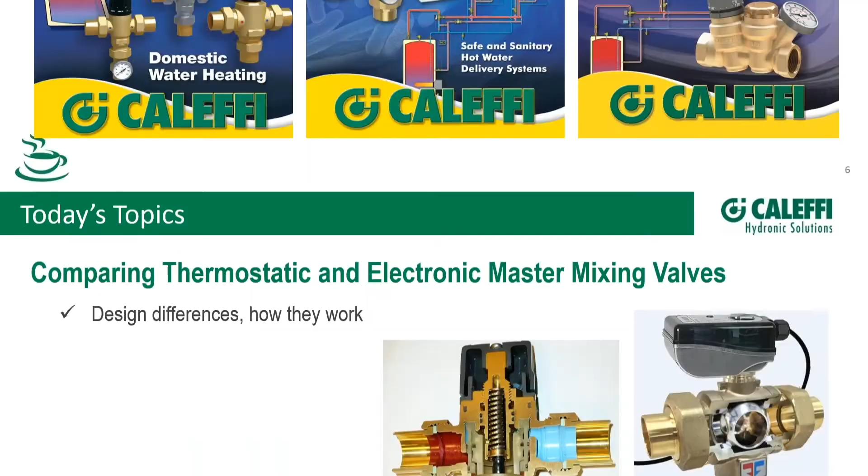All right, let's talk about today's topics. We'll discuss differences in designs, performance, accuracy, things like proper piping, flow rates. We'll look at some specifications and requirements that are different from thermostatic to electronic master valves. We'll talk about recirculation and balancing - that's a really interesting and information-packed section of the PowerPoint. We'll touch on service and maintenance. And then lastly, we want to talk about thermal disinfection, raising the temperature to kill Legionella bacteria - that's near the end of the presentation.

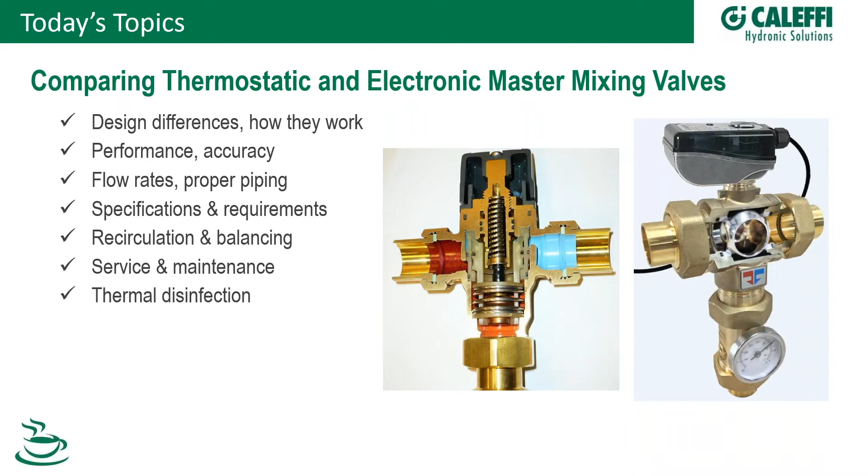So at a high level, 50,000 feet, here are some things you might think of when you think about the main differences between thermostatic and electronic valves. What comes to mind first is cost - in general, a thermostatic valve is going to be less. That might not always be true, but in general that will hold true. Next, ease of installation and familiarity - lots of these are installed out there, approaching 1 million, right Bob? People are very familiar with thermostatic valves, so that's a simple one.

Ability to handle scale - this is an interesting topic. An electronic valve gets the nod there because there are some models that can actually do a periodic sweep or rotation of the valve seat to flush away scale, and we'll touch on that too. Min to max flow range - in general, an electronic valve can handle maybe a lower min and a higher max, and we'll look at that too. We'll also talk about recirculation temperature creep.

This comes up a lot - we get a lot of questions about creep. What is it? How do we prevent it? And then we'll talk about added functionality, alarming, remote access - electronic valves get that nod as well.

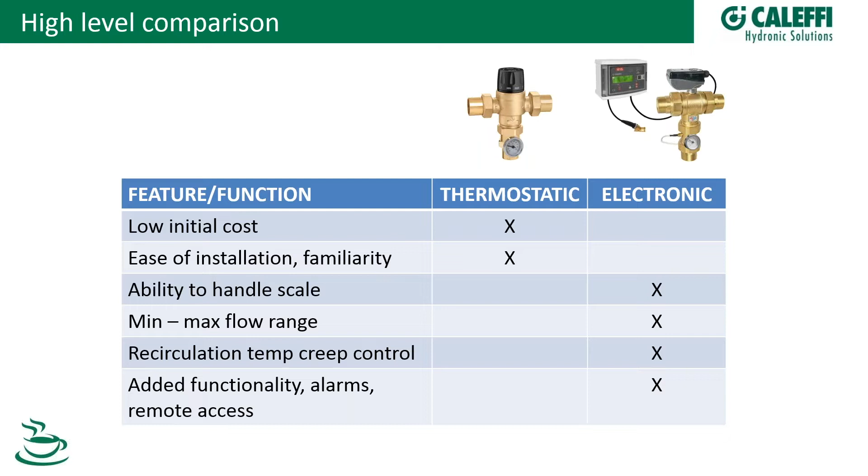Before we get into the meat and potatoes, we have a poll question. We'd really like it if everyone could answer this: for plumbing applications, have you ever specified or installed thermostatic mixing valves, electronic mixing valves, both, or neither yet? I'll pause for a few moments and let everybody enter their vote. We'll run this for about 30 seconds, but we're just trying to get a feel for what's being used out there and how much traction these new EMV electronic mixing valves are getting in the market. That'd be good information for us to have, so we make sure we're on the right page as we develop this product.

So there we go - thermostatic mixing valves at 47%, EMV's electronic mixing valves only 2%, both 39%, and neither at 13%, Kevin. Yeah, that is interesting. Thanks everybody for doing that.

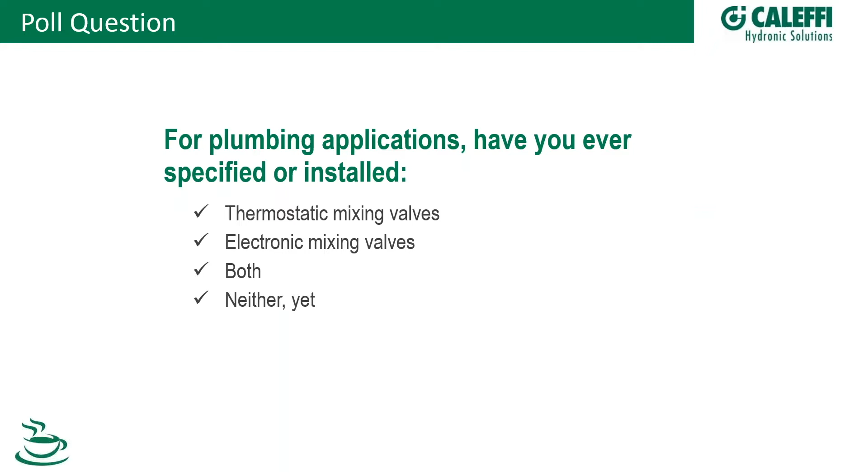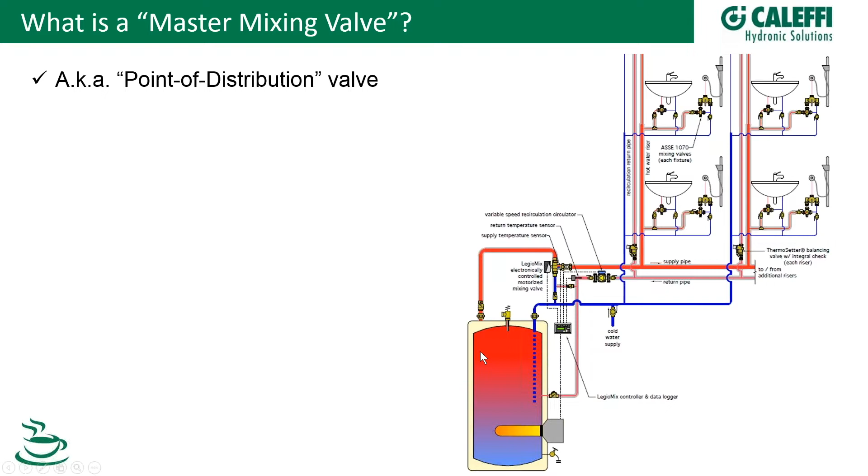Let's get into it. So the first thing we need to do is define what is a master mixing valve, so we all know what we're talking about here. It is a point of distribution valve. If you look at this schematic here, this particular schematic has an electronic master mixing valve. So this is at the point of distribution, which means it's located near the hot water supply.

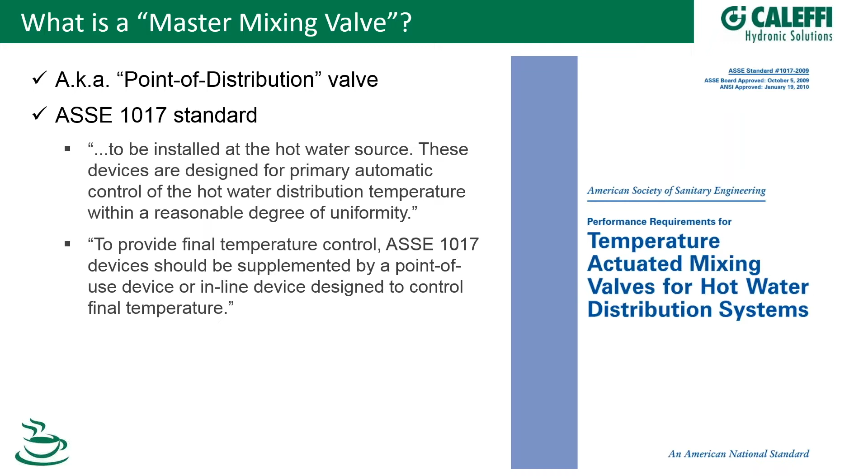These valves are governed primarily by a standard called ASSE 1017, and this is the cover of it, and a couple of quotes that describe what it is. This standard describes the point of distribution valve, and it also says you need to be providing point of use or inline devices to prevent scald protection and do final control. The way I remember that is ASSE 1017 comes before 1070, and those point of use valves are 1070. Let's take a look at just one slide to look at what this standard is.

It's interesting. There's basically three tests in this standard, and the first one is a conditioning test. So what they do is run the valve with 200-degree water and 125 psi for 6 hours. That's a kind of a torture test to begin with, just to make sure the valve doesn't leak or blow up or fail in any way.

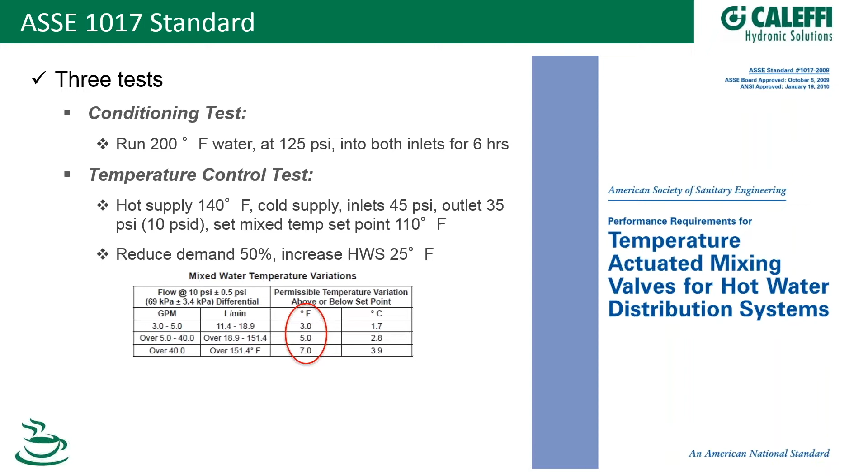The main part of the test is a temperature control test, and so what they do is provide 140-degree hot supply. The cold supply water is whatever's available, and the inlets are set at 45 psi. That's the cold and hot inlets, and the outlet at 35. So there's a 10 psi difference across the valve, and they set it for a 110 degree set point.

And then at that point, what they do is look at the actual water, and that table shown down below is the accuracy. So depending on the flow of the valve, they make sure that it's plus or minus 3 degrees if you're in that low flow range of 3 to 5 GPM. And you can be plus or minus 5 degrees in the middle range, and then plus or minus 7 degrees at the high range. So what they're really doing there is defining the accuracy that the valve needs to handle to pass the test.

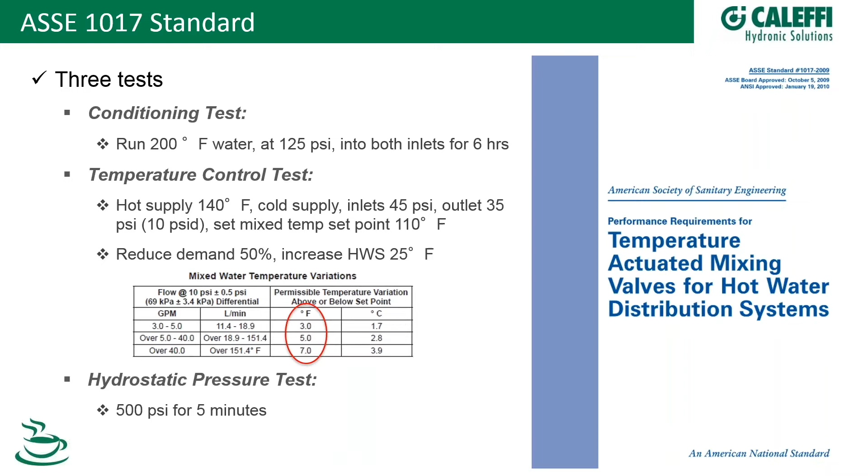And then they reduce the flow by half and increase the hot water supply by 25 degrees. And the valve, during these changes, it has to be stable within those temperature variations there, and then it will pass that part of the test. Lastly, they do a hydrostatic pressure test and pump it up to 500 psi for 5 minutes and make sure it doesn't blow up. So that's really the test that is used to qualify a point of source valve.

All right, let's cut this thing open and see what's inside of a thermostatic master mixing valve. Now, this is pretty typical for any brand that's out there, but mainly there is this, I call it a thermostatic motor. So this gold part right here that the arrow is pointing to, that is a sealed element, and it's filled with a special wax compound that's heat sensitive. And what it does, it expands and contracts and causes this linear motion up and down right here.

So as it heats up and expands, what it does is move this cylinder or this cartridge right in the middle of the body here up and down to then proportionally mix the hot and cold water coming in. So as the element is warm, it expands, and as it cools off, it contracts to mix that water.

Now, what's important for stable control is that you have well mixed water around that motor. If you have laminar flow or really low flow coming in through those ports, then you can envision that thermal motor might be hot on one side and cold on the other. And at very low flows, that can happen, and then the valve can be unstable. That element might not be sure what to do if it's hot on one side and cold on the other. So it's important to have enough velocity and well mixed water around that motor.

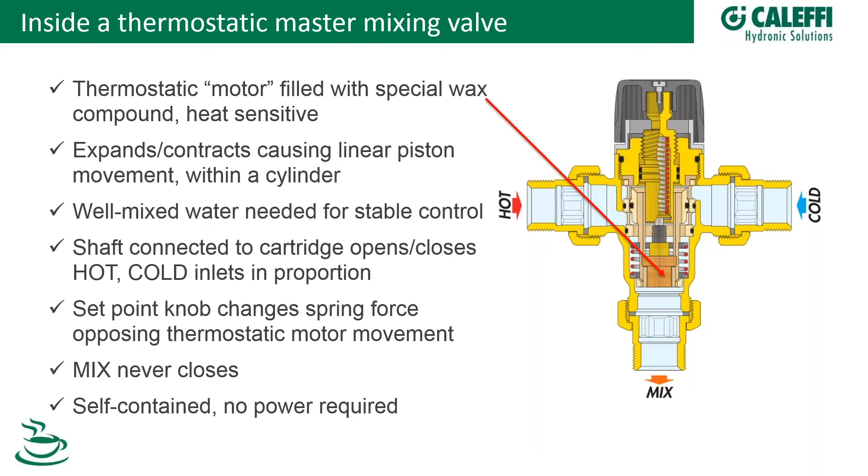Let's look at an electronic master mixing valve. Now, this sample is just a globe type valve. There are other types of valve, but the difference between an electronic and a thermostatic - in this one, it's linear also, so the stem right here moves up and down.

That's similar to a thermostatic mixing valve. And inside, if we look at this cutaway, what we'll see up in the stem area or the bonnet of the valve are some packing seals. The ones I'm familiar with have a Teflon type of what's called a V-ring, and they wipe the stem. Typically these stems are stainless steel, and those packing seals keep the stem clean as it moves up and down.

And this example here, if you look, there's 2 inlets - an A inlet on the left and a B inlet on the bottom. And there's 2 seats there, so that plug has a seat, a mating surface on the bottom, and another mating surface on the top. So as the stem moves up and down, it proportionally changes the flow for the 2 inlets to the outlet. Now, a lot of globe valves have metal to metal seats. What that means is there's no soft seating surface in there. And a metal to metal seat is going to have some amount of leakage, and we're going to talk about that in just a minute.

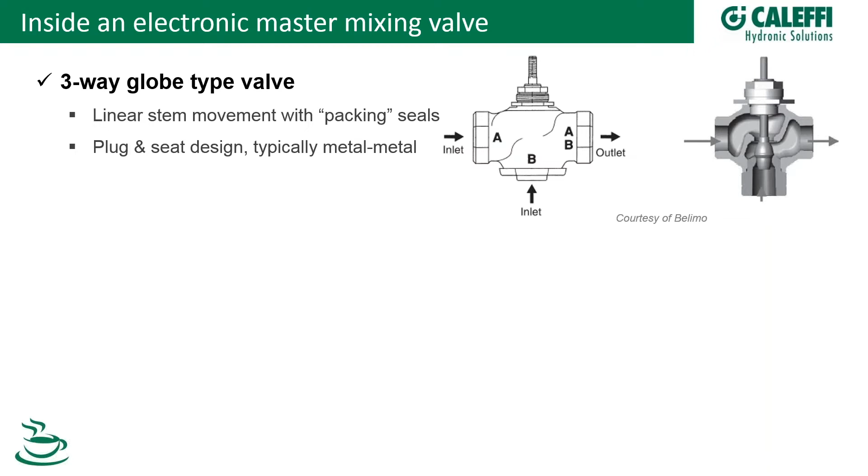Another kind of electronic master mixing valve type is a rotary or a 3-way ball valve. Here's a cutaway of the Caleffi Legiomix. So rather than being linear, it's rotary - the stem rotates 90 degrees, and up in the stem area, typically you'll have O-rings. So as the stem rotates, it rotates within the O-ring seals. And that ball will rotate - there are rings on the edges of the ball here, and that's where the seal is provided on a ball valve that's rotating.

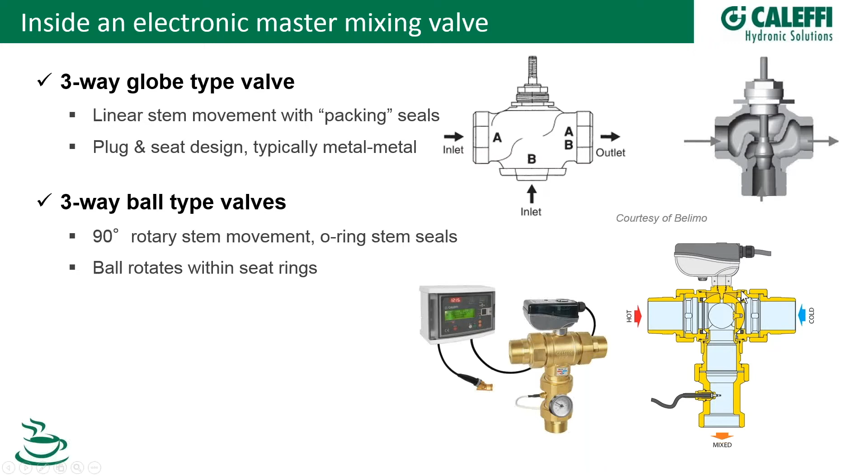So both of these types, no matter what kind of electronic master mixing valve you have, they require some sort of proportional or floating control actuator. They have to modulate. A proportional actuator would be a 0 to 10 volt or 2 to 10 volt, or perhaps a 4 to 20 milliamp proportional type signal, or a floating, which is a 3-wire drive one way, drive the other way signal. Those are all modulating, and to do mixed temperature control, you have to modulate.

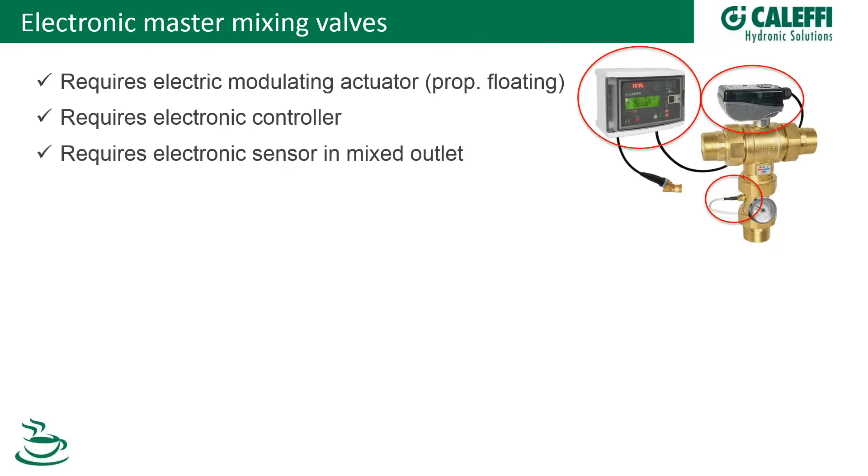So that's the actuator. You also require a controller - something needs to tell the actuator what to do, and that is, in this case, the controller for the Legiomix. And you have to have a sensor in the mixed outlet. In this picture, you can see that sensor next to the gauge is screwed into the outlet adapter there, and that sensor is wired to the controller, which then tells the actuator what to do.

Here's a flow chart or diagram that I like to use. In the mixed water is a temperature sensor. As the water temperature changes, that sensor sends a signal back to the controller as an analog input, and within the controller is some type of control algorithm. This might be a proportional integral, or a PID, proportional integral derivative type of algorithm. What that does is compare the set point you've programmed into the control to the value coming back from the sensor, look at the amount of error in that signal, and then decide what kind of modulating signal to send out to the actuator, which then positions the valve, which then changes the mixed water temperature. So this is a closed loop control system, just a really basic look at how that works.

Now in this picture too, notice this sensor right here. The Caleffi Legiomix product has a return sensor. This is used when we do thermal disinfection to kill Legionella, so I wanted to point that out. It's not really typically required for doing normal mixed control. It does give you the value, but it's used in the control logic for thermal disinfection.

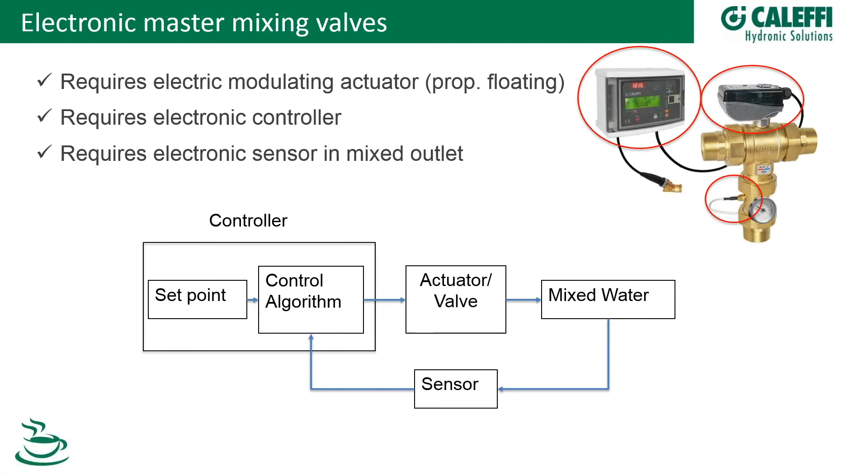Some of the differences in specifications - I mentioned earlier the thermostatic valve is just standalone, doesn't require any electricity or electrician or anything like that. I want to talk about fail-safe or spring return. That question actually comes in quite a bit when we're talking about the electronic mixing valve. The Caleffi product you see on the right does not have a physical spring, so it's not spring return. It doesn't have a fail-safe mode when you remove power. Fail-safe is a term I use if you have a supercapacitor or some other type of electronic technology in the actuator - you can do the same thing as a spring return does. It's just an electronic way to position the valve in the event of loss of power.

How important is that in a master mixing valve? It's a good point of discussion. If you lose power in the building, your recirc pump's going to turn off, everything's going to turn off. So then if you have water draw at a fixture, that valve is just going to be sitting in the last position. Is that bad? Don't know, it depends. Either way, we highly recommend using a UPS, an uninterruptible power supply, on anything critical such as an electronic master mixing valve.

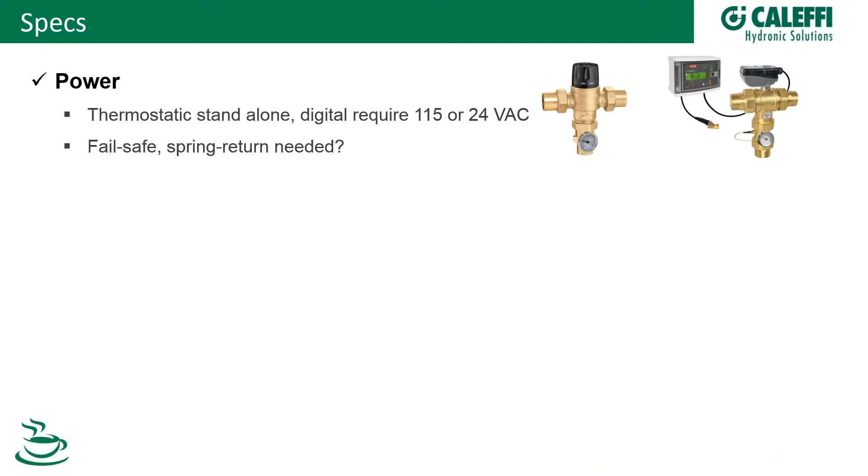What about accuracy? I mentioned earlier in the discussion on ASSE 1017 that as long as you pass these temperature variations, then you're approved to ASSE 1017. So that's doable with a thermostatic or an electronic valve - it's not actually that difficult to maintain that kind of accuracy. Now some folks will say that an electronic valve is more accurate. It certainly can be, and it can be faster depending on how you program it and whether you use the PID program or some other algorithm. You can actually change and control the speed of response. But really the accuracy depends a lot on the valve type, the mechanical side of the valve, the design, and in combination with the actuator and the controller. So all of them together will affect the accuracy. Really, just check the literature, the data sheet on the individual products out there for that accuracy. And of course they're all going to say 3 degrees or better because they have to pass ASSE 1017.

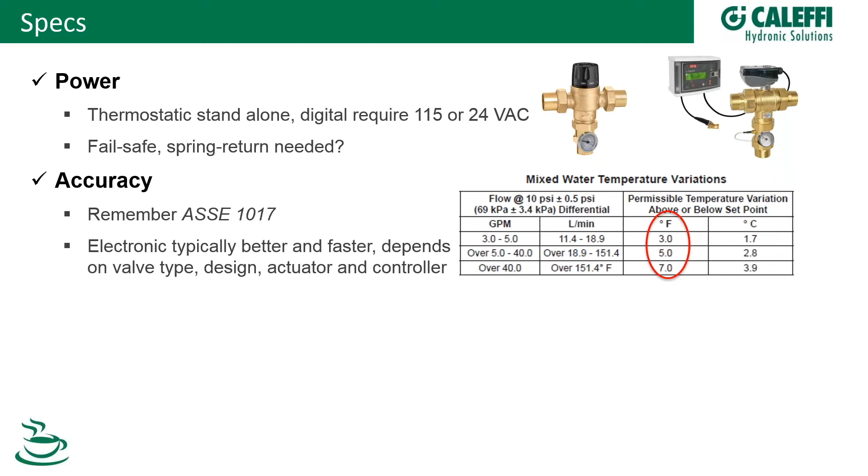What about the sensors? I mentioned that thermal motor, that integral wax element in a thermostatic valve, really basic. Now mixed electronic valves will use maybe a thermistor or an RTD or some other type of electronic sensing device. They're all going to have to meet the low lead laws for North America. ANSI NSF 372 is the one that governs products used in drinking water. So all the products you are able to buy to do this are going to meet that law.

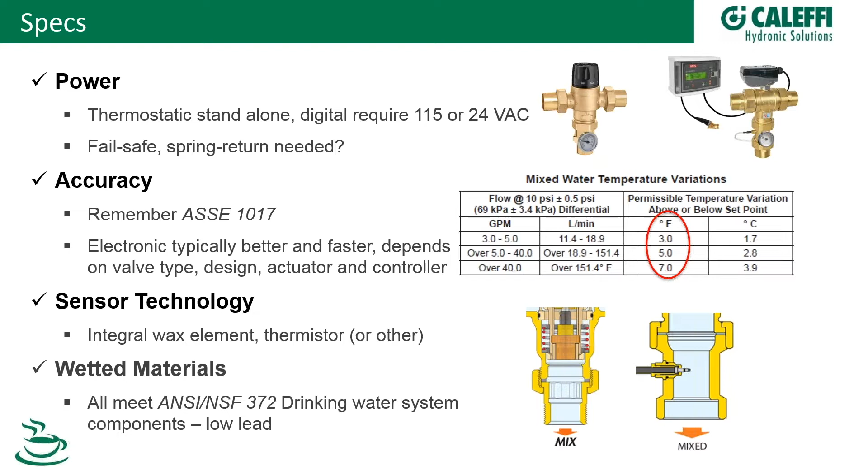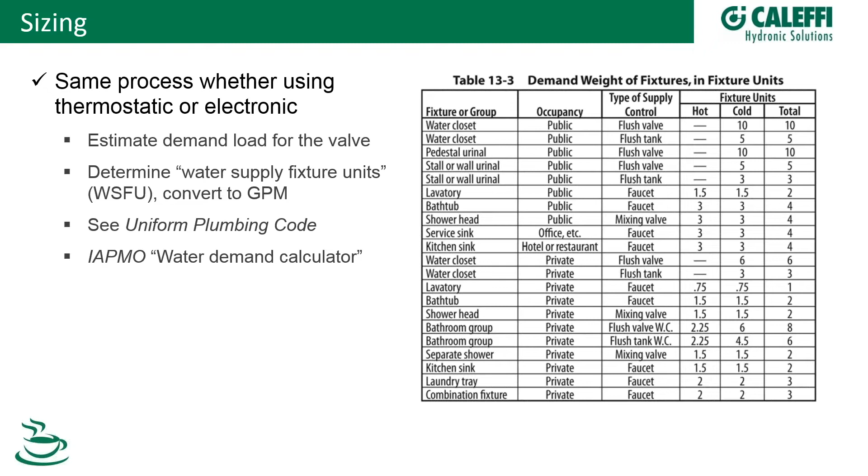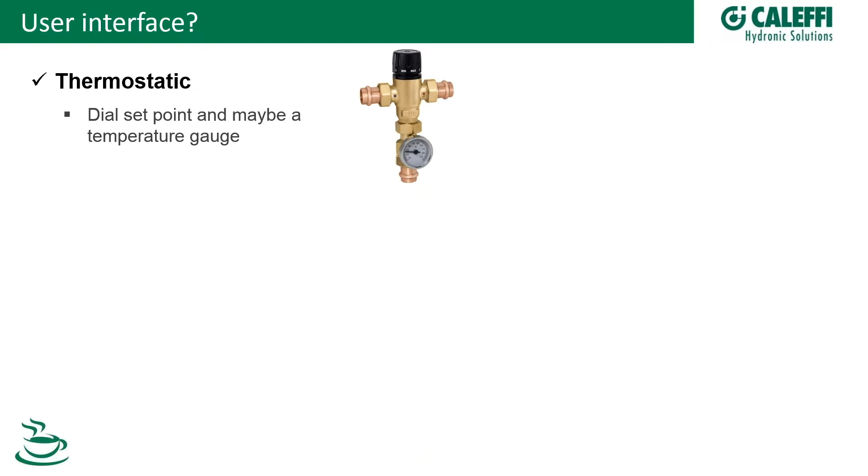What about a user interface? How do you look at a thermostatic valve? Well, you really just have the dial set point. The man-to-valve interface is really just a physical dial, and you may or may not have a temperature gauge to provide feedback. That's all there is with a standalone thermostatic mixing valve.

But electronically, everything opens up. The world is available to you. So there are a lot of products out there that have LED, LCD user interfaces. A lot of advantages to going with this.

First of all, you can set an exact set point. You can set it for 120 if you want, whereas with a dial you're only getting as close as you think you can. There are a variety of configuration options, local and remote indication of temperatures and status, just like any other electronic product. And of course, that gives you web access and integration to a building automation system. It's wide open, really depends on the product that's available.

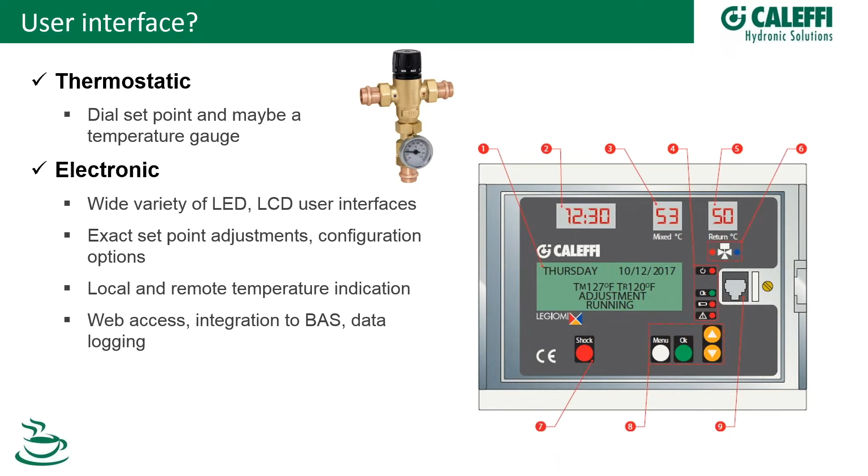Let's get into a little more technical detail here. Let's talk about close off. What I'm talking about is the inlet ports, the hot and cold inlet ports. Most thermostatic valves are not designed to close off 100% on those two inlets, and that's not a problem. Some flow through is actually pretty normal. If you're thinking about just regular mixed temperature control, it's really not an issue. The thermal element will move up and down and mix the water as needed to maintain set point.

Now that can become a problem, and we're going to discuss this in detail later when we're talking about recirculation and temperature creep. So we'll wait and get to that point.

Another thing to note is that metal-to-metal seat globe valves will have some flow through. There's actually an ANSI standard called a leakage standard - class 1, class 2, class 3, class 4. Whenever you have a metal-to-metal seat, you're not going to get what's called a bubble tight close off. That means a globe valve with a metal-to-metal seat could still allow temperature creep in a recirc system. Most ball valves, just by the nature of the ball and the seals, are referred to as bubble tight. So there's no flow through.

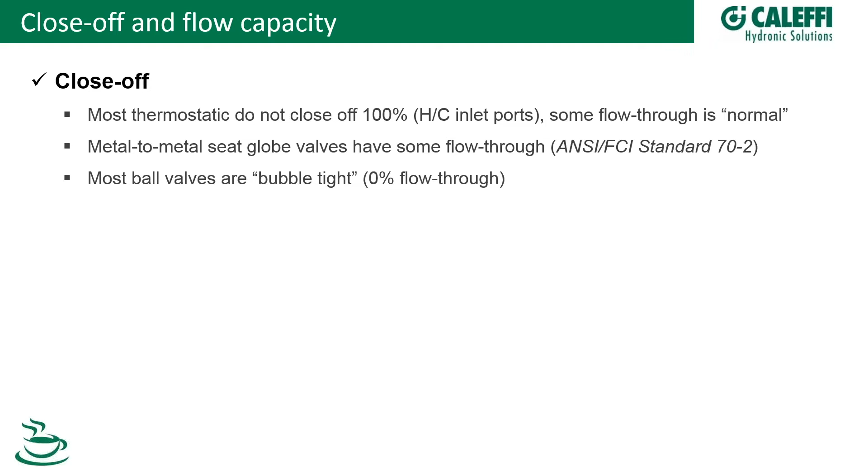What about capacity? A lot of people ask about capacity, so let's spend some time on this. The capacity of the valve depends on the type of body and the internal design. Here's a table that shows references for 3 different pipe sizes: 1, 1.5, and 2 inch. A typical maximum CV for a thermostatic valve, you can see there, 3 to 7, maybe 12, maybe 16 on a 2 inch. And when you go to different types of valves, the flow capacity changes a lot.

A spool or cage type valve or cartridge type valve, generally they're a little higher. You can see these numbers are higher than the thermostatic. And a globe valve, maybe 12 CV on a 1 inch, maybe 30, and then 45 on a 2 inch. Those are, if you look across the industry, pretty typical maximum CVs. But the ball valve - look at that - the maximum CV for a ball valve is significantly higher.

Now, why is that? Ball valves will have higher flow capacity because they have lower pressure drop. The larger effective area through the internal side of the valve allows for more flow and lower pressure drop. So what that actually means is there could be cases where you could use one ball valve where you might need two of the other types of valves to meet a certain maximum GPM requirement, if you're on the bubble there with the GPM maximum.

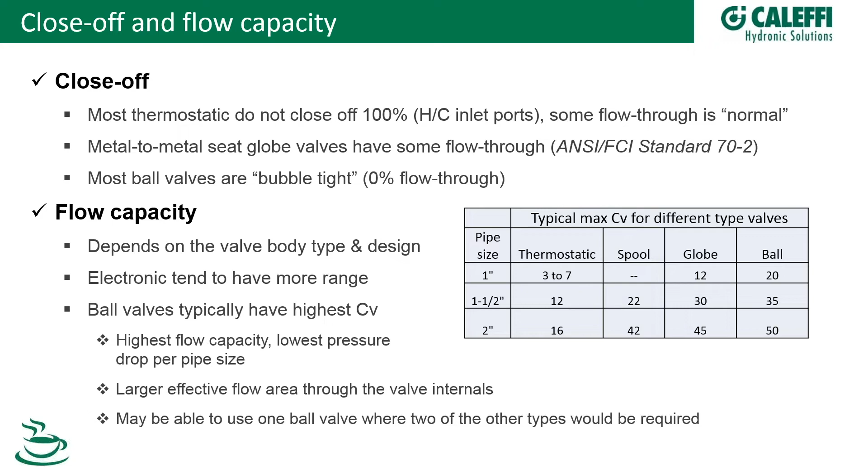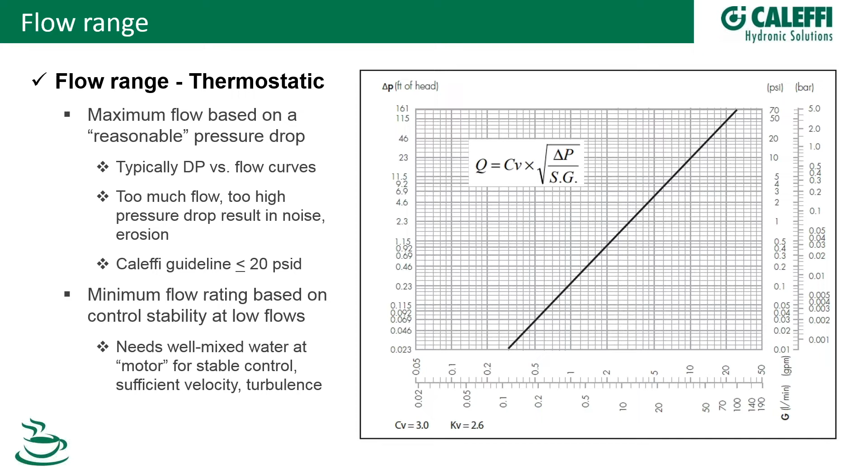The minimum flow on a valve like this is really based on the control stability. Remember, I mentioned earlier this whole issue of laminar flow and that you need a nice mixed turbulent water flow around the thermal motor to keep it stable. That's basically how we determine the minimum. And that really is determined in the lab by empirical testing. It really depends on the design of the valve internally. So there's that statement about well mixed water.

And you need a differential between hot and mixed. I mentioned that earlier too. So a thermostatic mixing valve needs to have temperatures to work with, okay? It needs a good hot temperature that's significantly higher than your mixed outlet set point, and it needs the cold water to work well.

So this valve right here, I mentioned the 20 psid maximum. Here we are right here at the top of the range. So in terms of what we recommend, this is pretty much the maximum, and that would correspond to around 15 GPM if you come down here on the x-axis. And this valve has been tested, and we know that it performs very well down at about 1 GPM minimum. So it will actually work lower than that, but we know that right in this range right here, or a 0.1 PSI pressure drop across our 521 series MixCal, it works great.

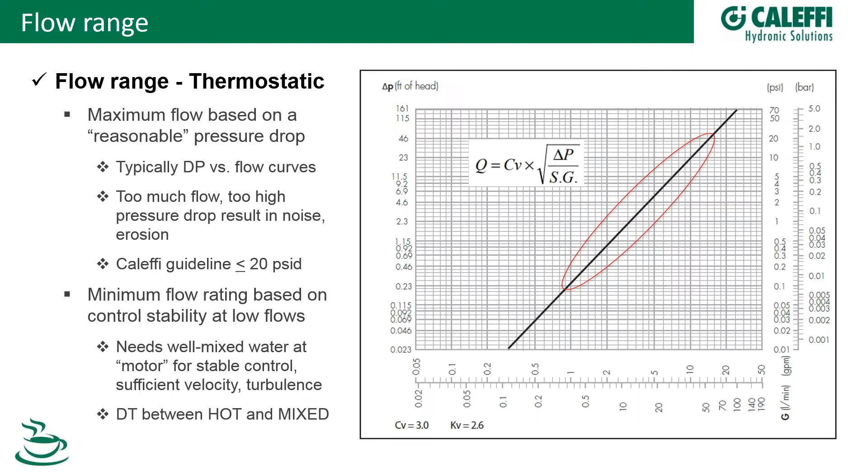So this is the flow range of this valve that has a CV of 3. And there's the equation that we use to determine flow based on CV and pressure drop. So what if we need more than 1 to 15 GPM in a master mixing valve?

Here's a product that we have that is we call a high-low thermostatic valve. And what it does, if you look down here, this is the 521 MixCal right here. So there's a 3/4 inch MixCal, the one we just looked at on the graph. That's this valve down here. Here's the big brother of that, the MixCal plus. This is a 1.25 inch valve.

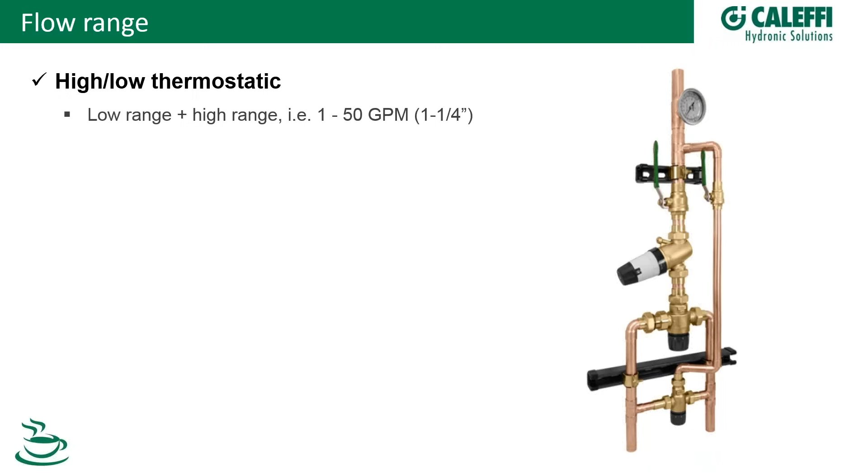And what we have here is these are piped in parallel, but right downstream of the big valve is a PRV. And when the capacity, the flow through this assembly starts to get up around the maximum range of this little valve, the pressure drop right here at the PRV will fall off and then open the port, so the big valve kicks in. So they work together in a staging kind of a relationship. And this assembly right here will deliver 1 GPM to 50 GPM. So remember, we looked at the valve by itself, it was 1 to 15. Now we're looking at 1 to 50 in this high-low assembly. So that's a very good approach. A lot of these out there, a lot of people build their own. We make this just like you see it here and ships in a box ready to go.

So you'll notice too that the minimums are a little bit higher. Yeah, that's the nature of a modulating valve like this. Now, one thing to know though is that whenever you're using one of these valves, you're probably going to be looking at a recirculation system. So if you have a recirc pump in this commercial application, generally it will fulfill these minimums. So if your recirc pump is running 3 GPM, then essentially with this 1-inch valve, you have a minimum flow of 0 draw from the fixtures that will still be within the control range of the valve.

The maximum flow again is going to follow that same rule. 20 PSID is a good rule of thumb, at least for our products. You'll see literature out there that says max differential 65 PSI, and that's just amazing, really. Who is going to put 65 PSID across a master mixing valve? That's kind of insane.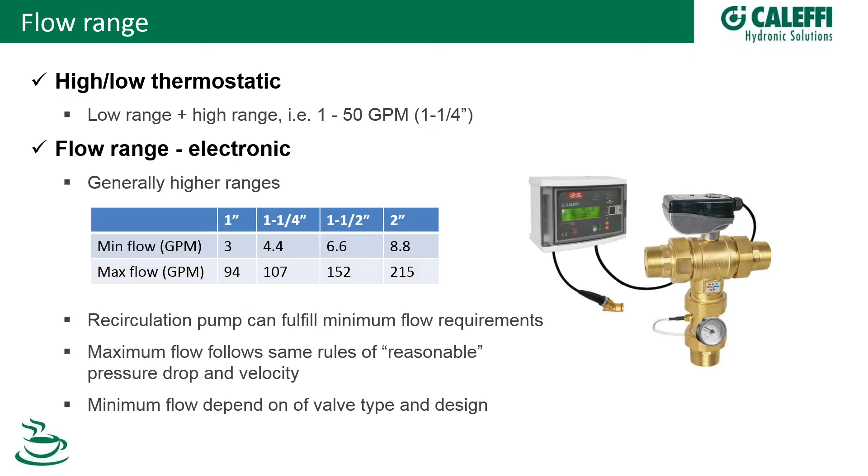Let me tell you what that is. In any recirculating hot water distribution system, there will be times when the circulator is operating and there's no water being drawn at the fixtures. So you can look at this as being a closed loop condition. If there's no draw, you cannot add additional cold water. What that means is you have to maintain that recirculating hot water temperature using just the return water.

And if you have a little bit of flow through on that hot port, then you can get creep. What happens is if more heat is being added to that recirc loop than is being given up by the supply piping to the ambient air, then you get creep because you're adding more heat to the piping than you are removing from it.

So if your piping is well insulated, which it should be, then the chance of creep is greater. If the piping is not well insulated and you have a lot of heat loss in that supply line from the valve out to the fixtures, then maybe a little bit of flow through at the hot port will not cause creep. But that really all depends on what's going on in the installation.

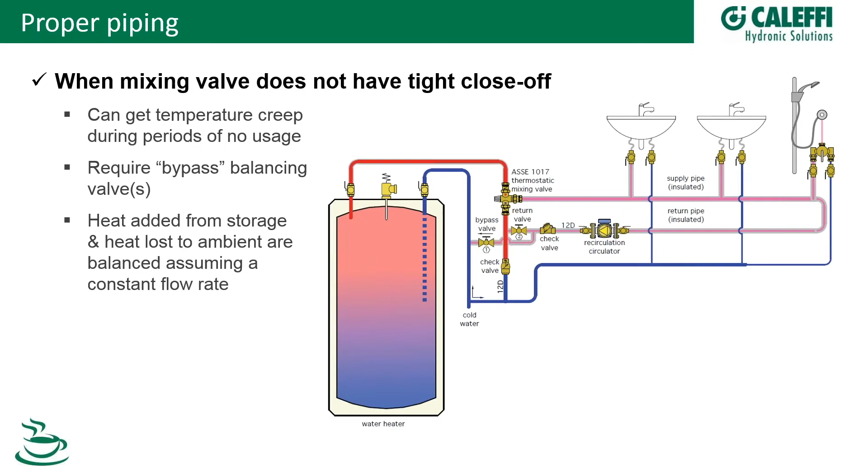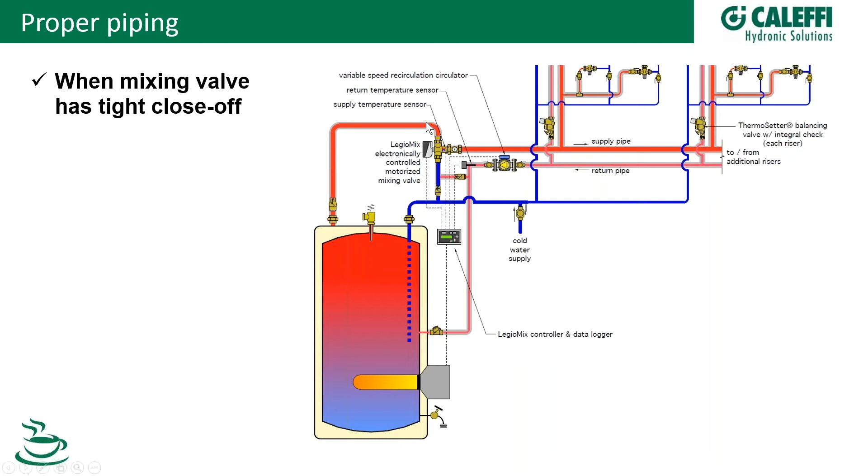Now let's say that mixing valve has tight close off. In other words, we have a master mixing valve here that does not have any leakage coming into the hot port right here.

You don't need the bypass balancing valves. Why? All this recirc water that's coming back, none of it can go into the tank because none of it can come out of the tank. So the return water is coming back here, going back into the cold line, and then out here where the heat is transferred to ambient conditions and then back. Creep is eliminated when you have a valve that can close off tight.

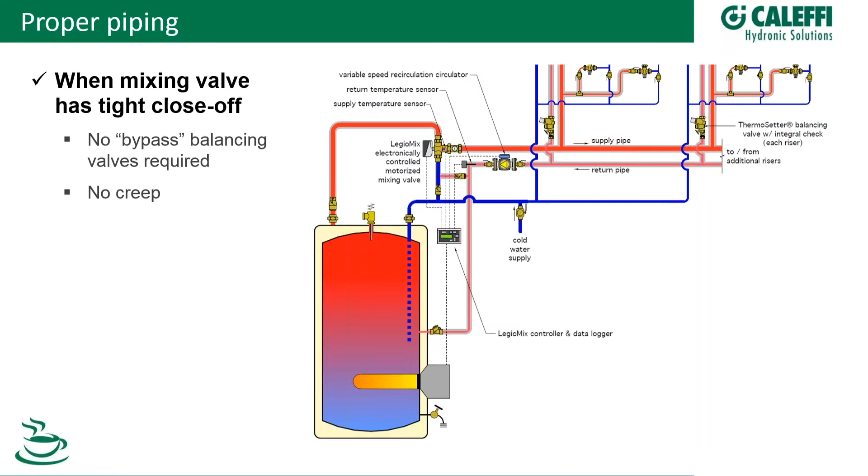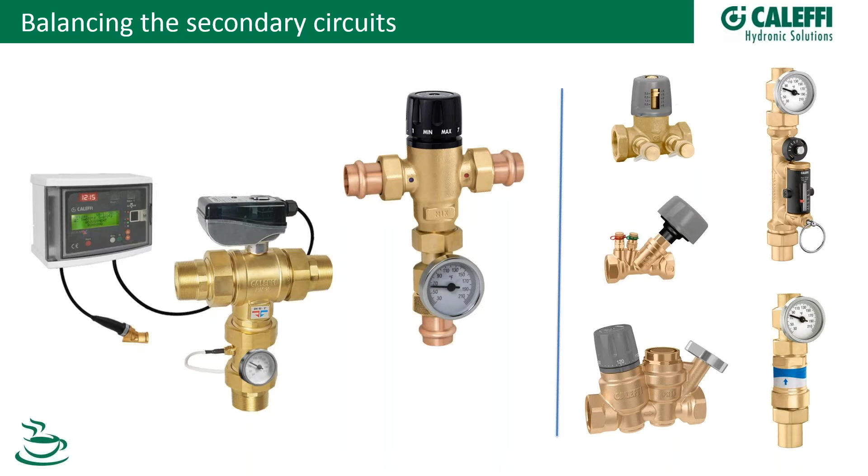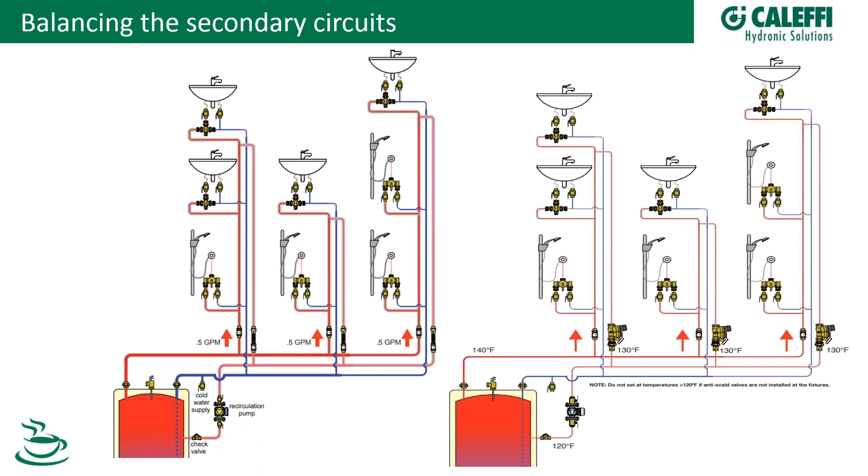What you do is you set the GPM for each of these risers to be the same. A manual balancing valve or an automatic one will set the same flow rate. Now we're balanced, okay? What I want to talk about is a thermal balancing valve.

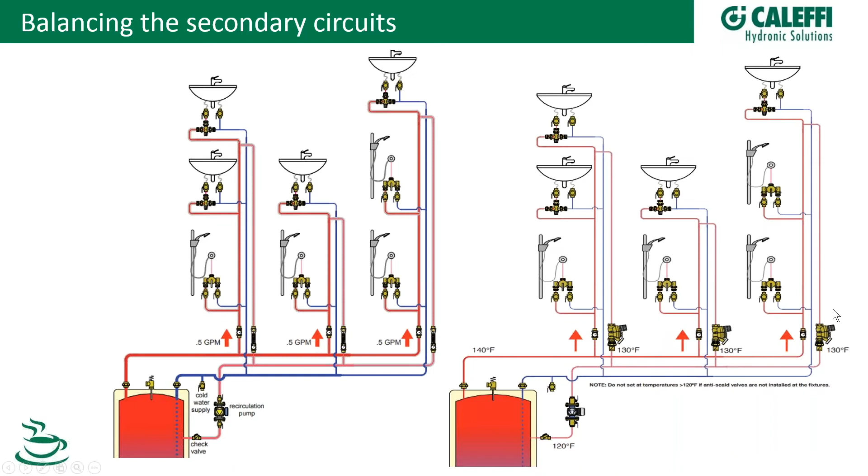It's a different animal, okay? It does not balance GPM. It's shown right here. This Caleffi thermal balancing valve, the Thermosetter, uses temperature. So rather than looking at GPM numbers, we're looking at temperature numbers. All you do is set this dial to a specific temperature, and they modulate open and closed to vary the flow in each of the risers to maintain temperature. So it's a really interesting concept. I want to spend just a little bit of time talking about that.

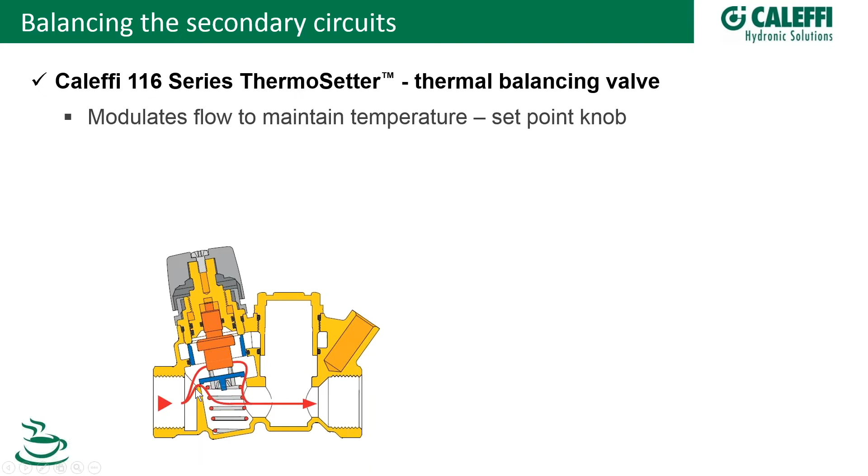Here's a cutaway of the Caleffi 116. This gold colored element right here is the same kind of thing you would see in a master mixing valve that's thermostatic. It's a sealed wax element, expands and contracts. As it expands and contracts, it opens and closes this seat right here. It's the only balancing valve that actually modulates flow in a riser. That's what's different about it.

Here's a graphical representation of how it works. Let's say we had the dial right here tuned in at 140 degrees Fahrenheit. As that water cools off, let's say the hot water supply is depleted or you're doing a startup or something like that. If the water coming into the valve is lower than what you have set, the valve will modulate open. What does that do? That brings more hot water to that riser to bring the temperature back up to set point. So these valves will generally work right in this region right here. They'll modulate open and modulate close to maintain temperature at that location. So very, very interesting concept.

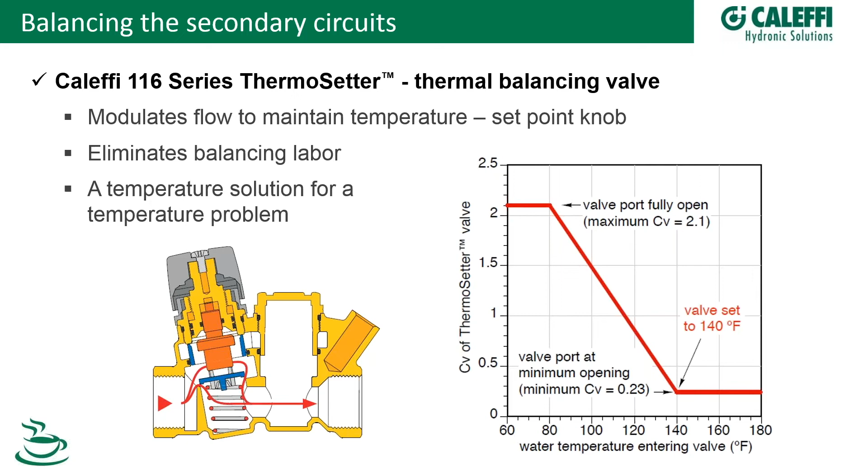It eliminates balancing altogether, right? If you install this valve and set the set point knob, there is no balancing. You just walk away. It will do what it needs to do to control temperature at that point. And I have a saying I like to use: it's a temperature solution for a temperature problem. So we're not having to use a differential pressure manometer and tweak and use charts or circular tools to set differential pressure that then corresponds to GPM, that then corresponds to temperature, right? Because that's what you're doing with a manual valve. And it doesn't rely on a fixed GPM. It just goes right to the point and controls temperature.

What does that look like in a system? This is a nice graph, I like to use this. Here's some staged tankless water heaters. Let's say during normal operation these are set for 140 degrees. So they're delivering 140 degrees to the electronic master mixing valve. We have that set at 130, which is a good supply temperature. And that supply water is going out to the system where we have anti-scald valves, okay? Very important at all locations to have anti-scald valves if you are delivering water temperature anything north of 120 Fahrenheit.

So then also in this schematic, we're showing the 116 series balancing valve. Where you install those is on this return pipe just before it joins back to the main return pipe trunk here. So this location is after all the fixtures, on the way back to the variable speed recirc. Why do we have a variable speed recirc pump here? Think about that for a minute. I mentioned that the 116 valves, the thermal balancing valves, modulate flow. That's different, right? They're not the same as the manual or automatic. So as these thermal valves open and close, what's that doing? It's changing the head loss in this return pipe. So if you put in a variable speed or a smart pump here and set that for a constant differential pressure, it works great with these thermal balancing valves, because as they control temperature, this pump will ramp up and ramp down to deliver the head pressure necessary to deliver the right temperature water out through the system.

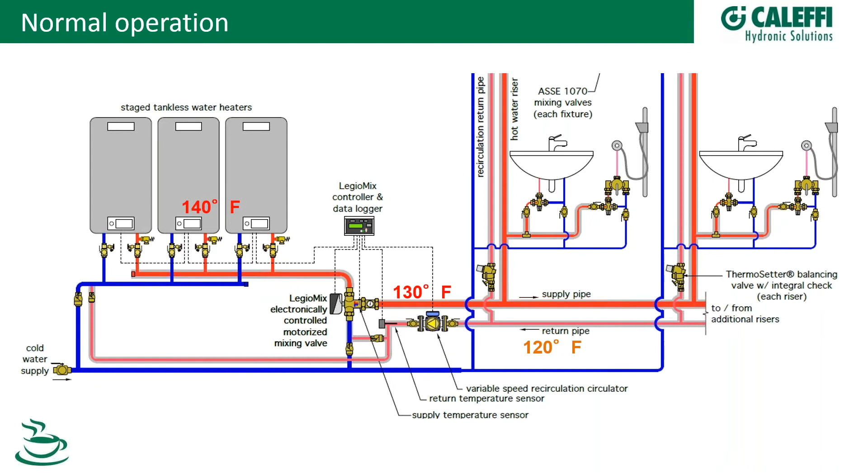I talked about elevated temperatures. I want to touch on controlling Legionella bacteria using elevated temperatures, or what we call thermal disinfection. I have a whole other presentation on this, so we won't go into too much detail, but briefly, Legionella bacteria, like shown in this picture, is everywhere. It's in lakes and streams and even in the dirt. It can actually get through municipal water treatment as well, so it's very common and can easily get into your plumbing system.

This stuff getting into your plumbing system will find a place. If the water is right here in this optimal growth area, in this gold band between like 68 and 118 or whatever, that bacteria, if it can hide in the biofilm or the scale or any corrosion layers, will grow and proliferate in your plumbing system. So keep in mind this temperature range right here.

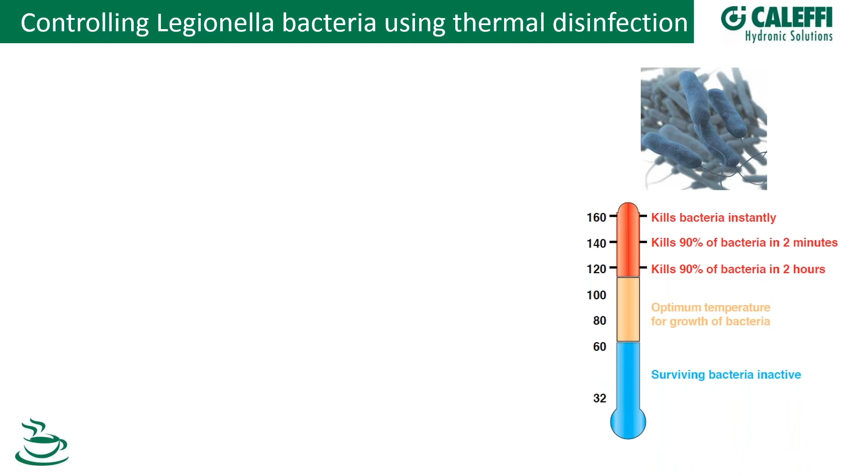So to kill that bacteria, there are two things you need to consider. First, you've got to get up into this kill range, above this point into the red zone or kill zone. And you have to maintain that temperature for a period of time. So it's a time and temperature formula to kill Legionella bacteria.

So why do I talk about all this? If we have a thermostatic mixing valve, you can set that on the tank and set your tank temperature to 140 using your aquastat or whatever is controlling your storage. And so this water is safe, right? This water is 140, so it's up in this red zone. You won't get any bacteria growth in this condition.

But what happens when you deliver that water through the thermostatic mixing valve out into the system and back? It's very possible that your temperatures are going to be down into this range here, which is undesirable. You want to stay out of that range all the time. So a thermostatic mixing valve can't protect the recirculation system because you can't elevate that temperature up above where you need to be to kill the bacteria.

Now, with an electronic valve, you can do this. You can actually disinfect the whole recirculation system either manually or through an automated process. Most of the electronic master mixing valves on the market have a button on the front or somewhere in the user interface that you can activate a shock. What that shock will do is tell the controller to set the tempered water set point up to 160 or so, and you want to leave it up there for about half an hour.

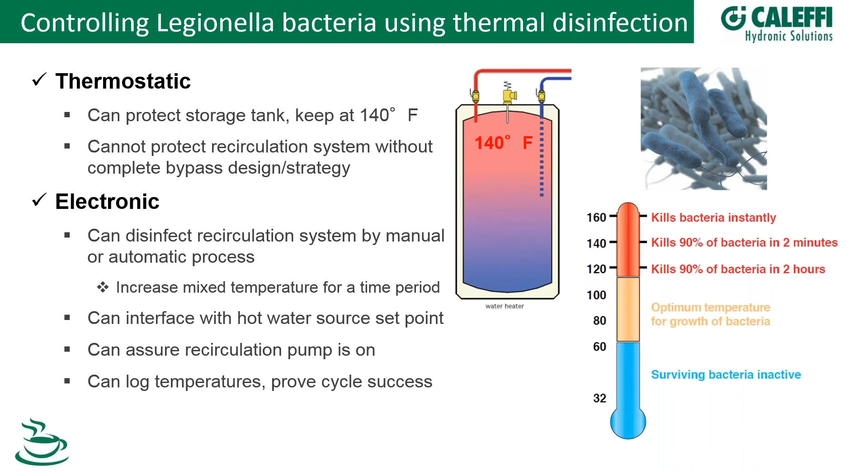If your controller has memory, it can log everything that's going on. The Caleffi product has a 40-day first in, first out buffer that records everything all the time. It records all the temperatures, supply and return, any alarms that occur, any status changes, and gives the building owner or manager a complete history of what's going on. Those are important things to look for if you're going to employ this strategy.

So how does that look now? Back to our system picture. What we would do during this thermal disinfection is jack up our supply temperature to about 170, mix it down to about 160, send that very hot water out through the whole system, and come back at 150. Now we are well within that kill zone for that half hour period, or whatever you set it to, to make sure all the bacteria is killed. It will even kill the stuff hiding in the biofilm and corrosion layer, because if we're at 150 degrees for a half hour, that whole pipe is going to get hot. So this is a very effective way to control Legionella, using elevated temperatures, and you need that electronic master mixing valve to do that.

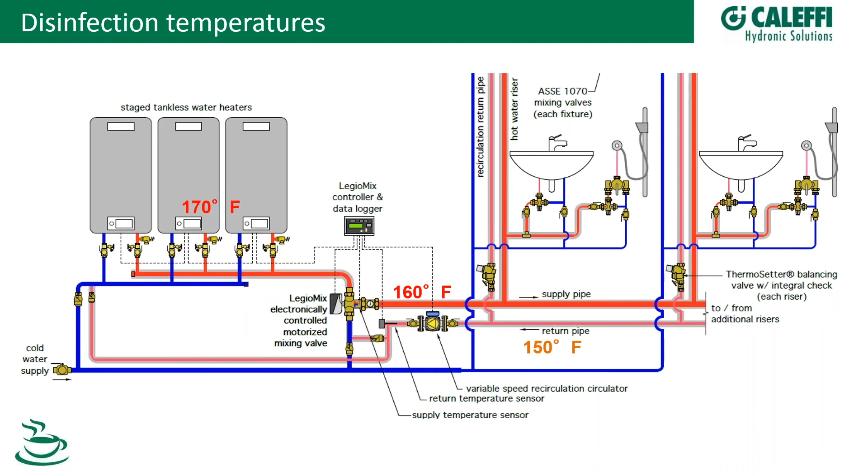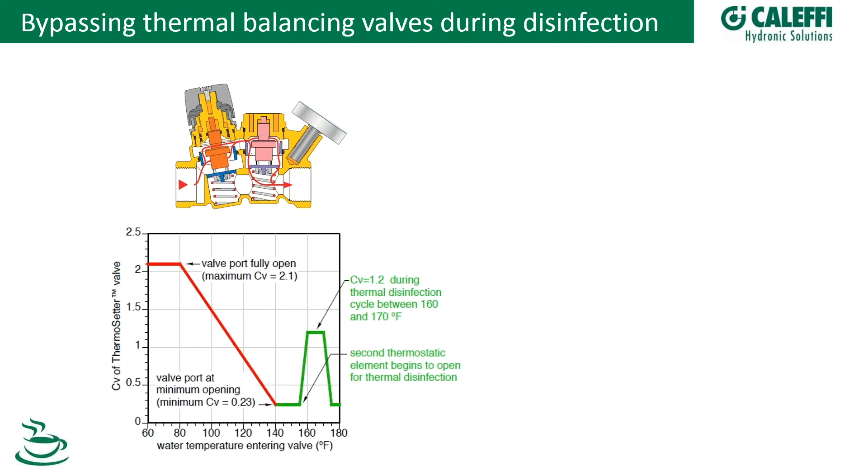There's another option too — in that second part of the body is a little zone valve, actuated by a 24-volt spring return on-off actuator with 2 wires. You can send 24 volts to all your balancing valves and pop them open anytime you want, opening the valve to a CV of 1.2 so you get good flow through the system when doing a flush or disinfection cycle. I wanted to mention those as an added advantage to that thermal balancing valve if you're going to do thermal disinfection.

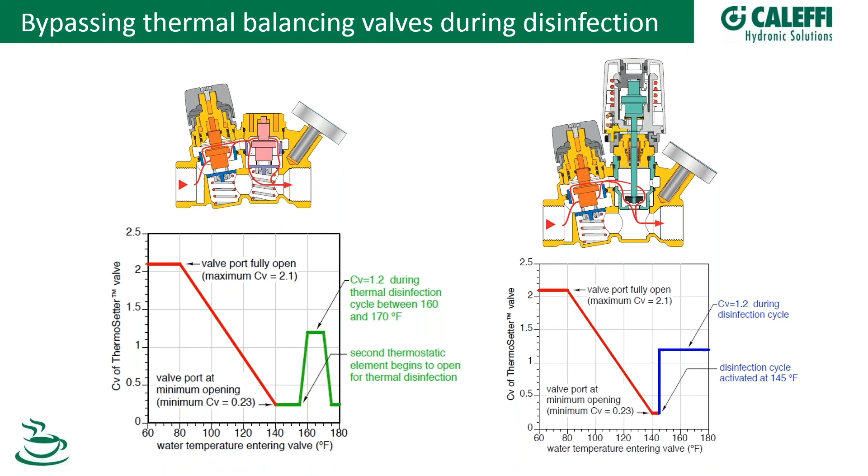How are we doing there, Bob? Mark, any questions so far? Yeah, there's been quite a few coming. I don't know if Mark's been typing back responses I haven't seen, but if not, we'll grab some at the end — all good questions too. Well, we're doing good on time, so there will be questions at the end. I only have a few more slides and we'll have time for questions, so keep them coming.

Okay, so let's talk about service and maintenance, comparing thermostatic to electronic valves. We know that scale is a reality — hard water is everywhere, and it's tough on everything. It's tough on valves, it's tough on pipes. Just plan for it; this is important.

What you want to have as a building manager and owner is a regular inspection plan. It's a lot better if you install isolation valves. I know that's an initial cost, but we don't always see that, and that causes real headaches during service and maintenance.

You know that scale remover, like this Lime-A-Way stuff and CLR and vinegar and water — I know Bob is a big advocate of this. You can actually pull a valve out, drop it in a bucket of this solution, brush it off, rinse it off, and put it back in service. That's something to know — at least our valves are cleaned that way. Now look for a valve that has internals designed to resist this. With the Caleffi MixCal valve, the engineered polymers inside really resist scale buildup, and it's easily flushed away because it's really smooth.

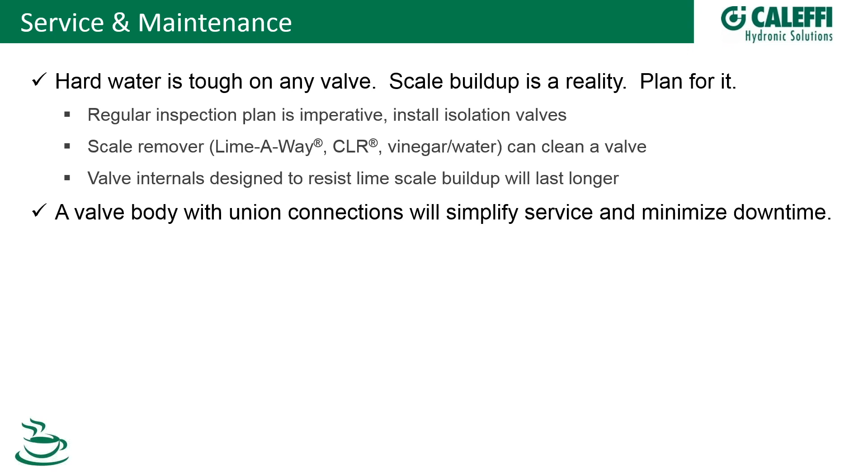Look for a valve body with union connections. Anyone who's done any pipe fitting or plumbing will know that union connections are your friend. They allow you to quickly pull a body out, clean it, and put it back in, minimizing downtime. That's a nice feature.

Something to think about too: electronic assemblies that have the integrated controller. If you have a master mixing valve where the controller and user interface is attached directly to the valve, those can be expensive and difficult to service, and you might have to take them offline completely. So that's something to consider.

One good thing about electronic valves is they can let the service people know what's going on. They can generate a service alarm if you have a sensor fault or a high temperature alarm. Of course, you can't get any of that with a thermostatic mixing valve. That's a really big advantage for electronic valves in the realm of service and maintenance.

Our valve, and I think one other product on the market, has a full cycle exercise feature. It's automatic, maybe in the middle of the night, where the valve goes fully open, fully closed, back to fully open. What that does is exercise the movement of the valve and seat, and it can clear debris and reduce service frequency because you're flushing away anything that might be clinging to the seat and the plug or ball of the valve. That's a great feature. It helps with service and maintenance.

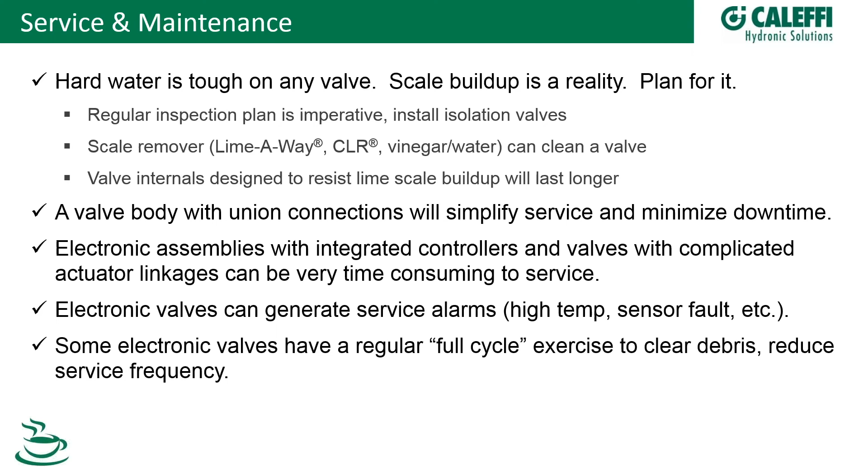A few other items to sum it up. I mentioned early on that thermostatic valves tend to be lower cost. They're easy to install, there's no wiring, no electricians needed. That's why they're so popular. They've been around forever, and there's nothing wrong with thermostatic mixing valves if they work for you.

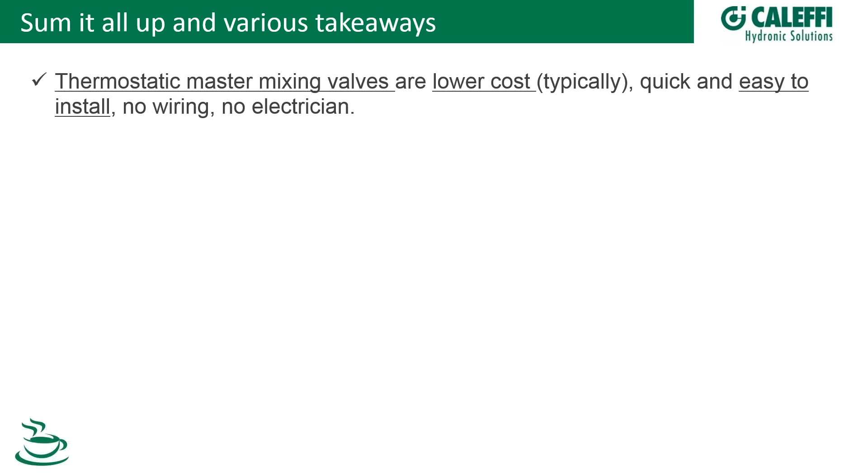Electronic systems with a full function user interface - what I'm talking about here is the push buttons for configuration, the display, and the alarms, all right there on the wall mounted user interface, compared to a master mixing valve where you have to bring your laptop out, plug it in, and bring up your browser or application. It's really nice to have everything right there in the user interface you can go to.

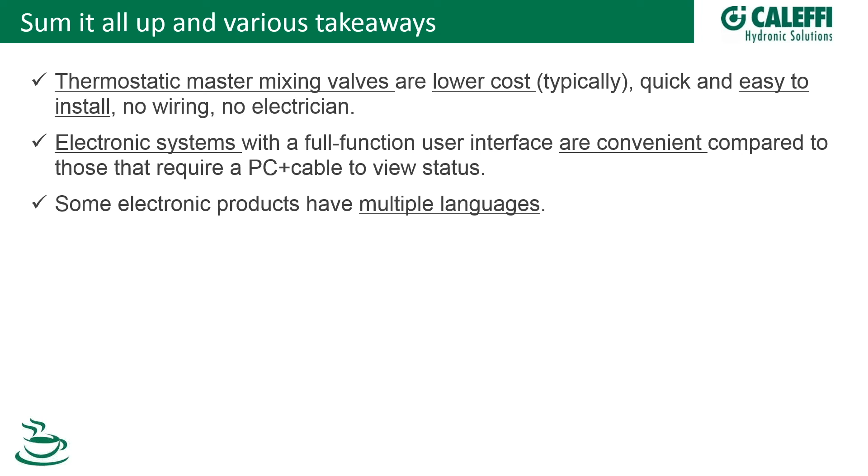Our product, the Caleffi Legiomix, actually has 11 languages in it, so you can select everything from French to Spanish - it's a global product. So if you're working with customers globally, or up in Montreal, or down in a state where maybe the building manager would prefer Spanish, you can just set that. Really a great feature.

A couple other technical things: the seals in the Caleffi Legiomix are made of peroxide cured EPDM, and that's important because EPDM, when peroxide cured, stands up to chloramines, and a lot of public water has chloramines in it. EPDM that's not peroxide cured will degrade quite rapidly compared to peroxide cured seals. And if you're using a brass product - a lot of valves out there are stainless, bronze, or brass - if you buy a brass master mixing valve, it's better to get the DZR, or dezincification resistant, alloy. That stands up to aggressive water, because aggressive water can actually leach the zinc out of the brass, causing micro cracks, and eventually the brass can fail if too much zinc is extracted.

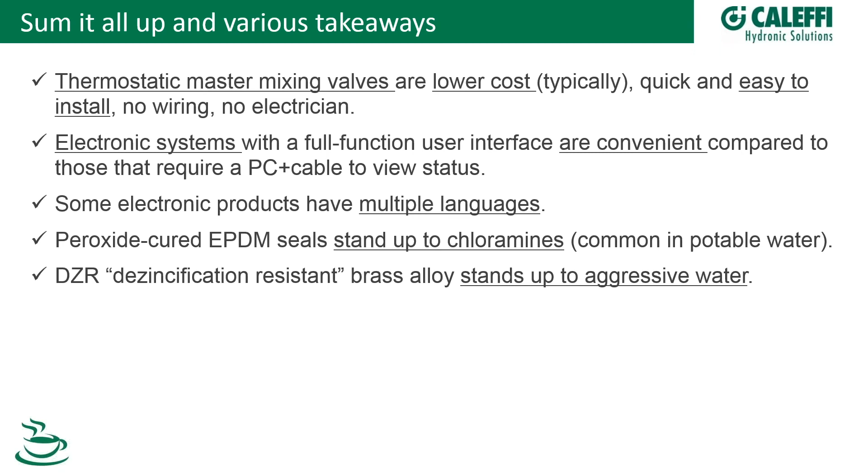So just to sum it up, we believe that an electronic master mixing valve coupled with a variable speed or smart recirc pump - set that pump to constant differential pressure - and a thermostatic balancing valve, will give you the ultimate modern domestic hot water control system. So that's where all of this was leading. A lot of advantages to electronic master mixing valves.

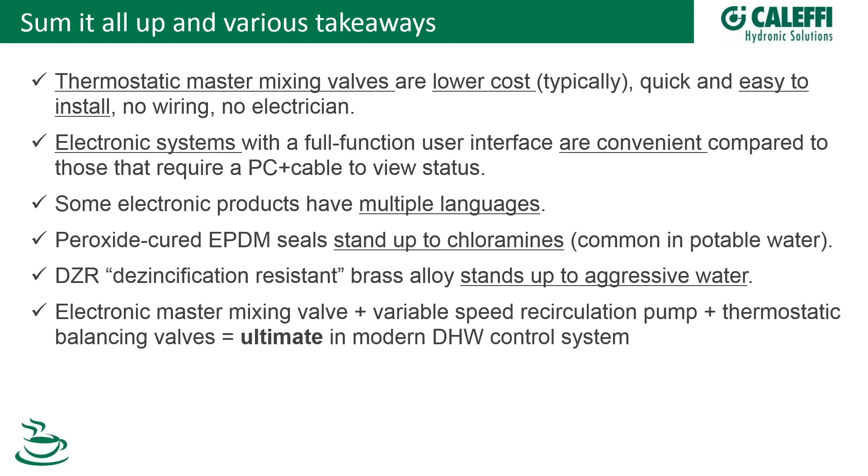We've had some comments and questions coming in concerning applications of thermostatic mixing valves, along the lines of: does the Caleffi thermostatic mixing valve have a problem if it goes through periods of no use, in terms of functioning properly? One of the writers had indicated they see in college dormitories where, say, if there's no demand for the summer, afterwards the mixing valve, not necessarily Caleffi, wasn't working correctly.

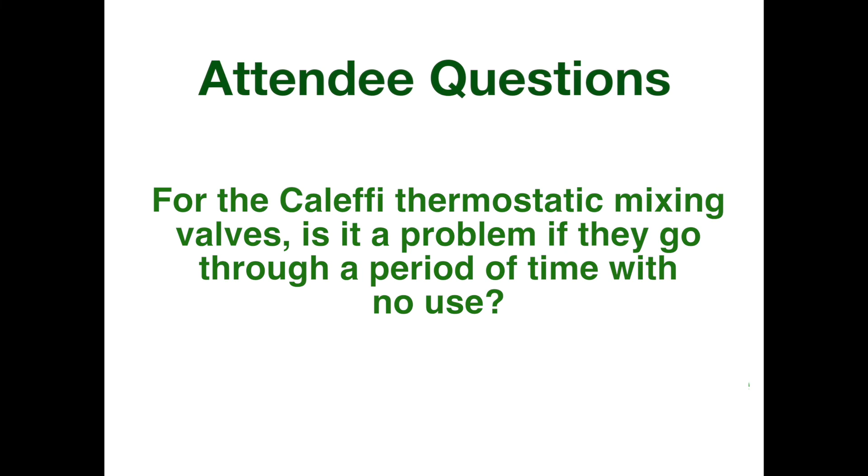Most thermostatic mixing valves in hard water applications will actually get scaled up, that's the failure mode. But it's especially pronounced in cases where you have a little bit of hard water but periods of no demand, because they're not exercising, they're not moving. Maybe the hot water heater is still left on in that dormitory for other purposes. And if the mixing valve is in close proximity to the hot water heater, even though the temperature of the water isn't the highest at the mixing valve, there will be some calcium that comes out of solution.

So 3 months goes by, there's a little bit of calcium buildup on that shuttle mechanism that you showed, Kevin. So when there's demand, it's locked in that position, and you're going to have too cool of water, and it's just not going to be stable, or maybe too warm water. So that's where digital mixing valves, if you have hard water conditions that aren't solved by other means such as water softening and the like, are a really good solution.

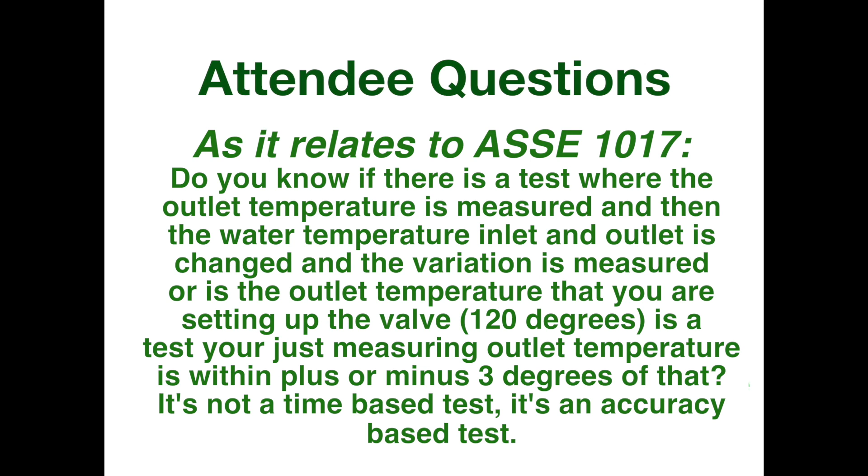Okay, very good. Back to digital mixing valves, you talked about different brands. Some brands might have an exercising feature, other brands of digital mixing valves, perhaps not. Is there a time of day that is recommended for exercising, and if so, when is that? Just in the middle of the night, sometime when there's generally little to no use, that's the best time to let the valve go through its stroke.

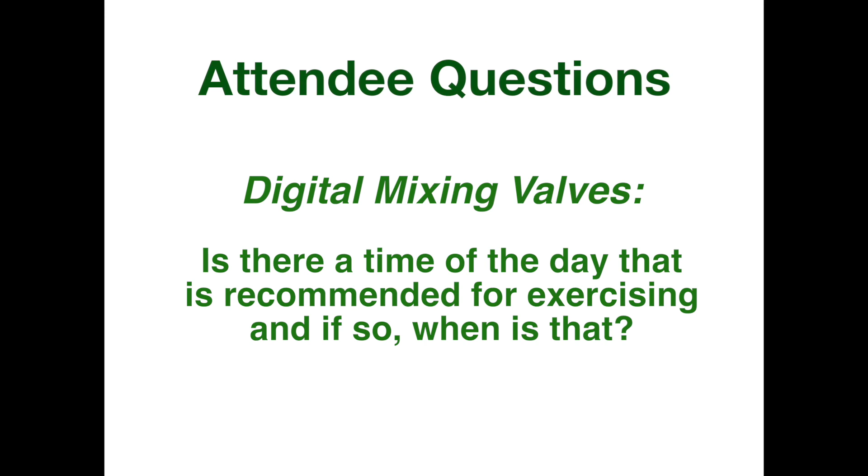The LegioMix valve takes a couple of minutes because it's a 60-degree stroke, so it goes all the way one way, all the way back, and then back to where it was. So you don't really want to do that when you have high usage.

Okay, very good. Another question came in concerning when you're showing balancing, commercial recirculation balancing valves - does Caleffi's thermal balancing valve close off 100%? Oh, the balancing valves, no, they have a minimum CV. If you remember that graph, there was a horizontal line near the bottom of the flow. The 116 has a minimum, you have to have that, or the thermal motor won't know what to do. You can never shut the water off completely. So there's always a little bit of flow through there so the valve can react to temperature changes.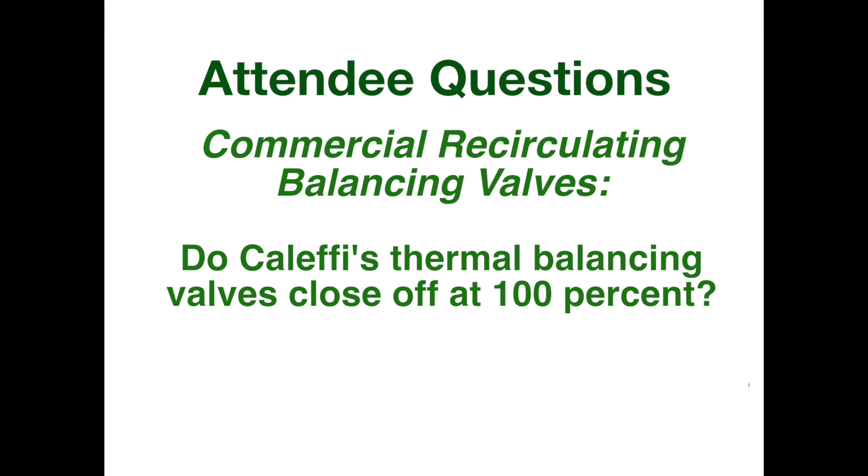Another question came in about scale. Are some thermostatic mixing valve products more susceptible to scale than others? I suppose that means brands. And I'll answer that: yes, they are.

It depends on the material used inside the thermostatic mixing valves, because all things being equal, scale will precipitate out on surfaces at different rates. Polymers, as an example, are more resistant to scale accumulation than metals. So a valve with a generous use of polymers versus a metallic moving mechanism inside will be more resistant to scale accumulation. The Caleffi mixing valve has a shuttle mechanism that's a polymer type design.

Mark, if I could add to that too, it's the temperature of the hot water that has a big effect on how often the valve scales up, because we know minerals precipitate out at higher temperatures. So if you're feeding a mixing valve 170 degrees on the hot port, there's potential to get a lot more scaling than if it was seeing 140 or 150 degrees. I forget the exact factor, but I think it doubles for every 10 degrees or so, the scale precipitation.

So usually when I see a valve that scales up quickly, like in this question here where they said they were seeing issues within the first 90 days, it could be that the hot water—number one, you've got hard water, extremely hard water possibly—but also that they're running that tank at an elevated temperature too.

Another question, and probably Bob, you're best to answer this, is related to that. If you do have a problem with the thermostatic mixing valve with scale, is it recommended to just replace it, or can you clean it, or does it depend?

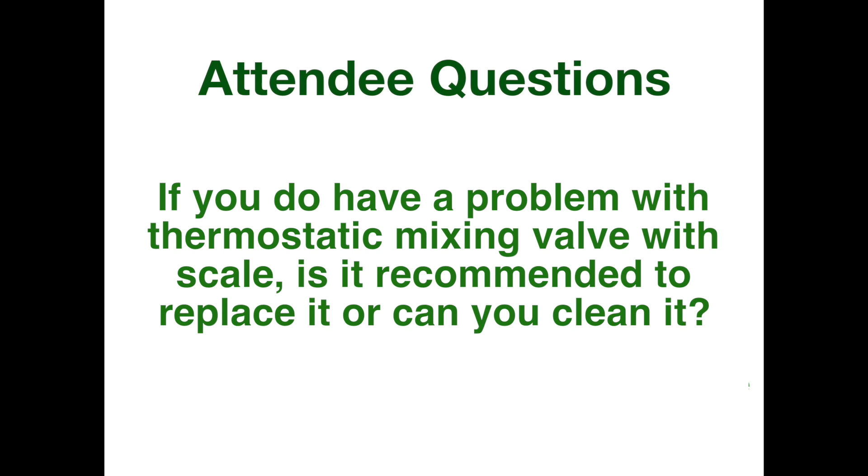Well, yeah, and this picture is a good place to be in. I can explain what I've done in a couple jobs, especially one like this where it's a critical application. If you put 3 ball valves on all 3 sides of that and a little service port next to it, like a Webstone valve—some of your folks know the Webstone's got a ball valve shutoff and a little full port ball valve next to it—you could actually run a cleaner through that valve without taking it out of there. You could just take the pressure off it, shut off all those 3 valves, and hook up a delimer kit like you'd use for a tankless water heater.

Usually it only takes about a half hour running that delimer acid through there to clean them out. If they're not plugged up completely where water's not going through them, then obviously you're probably gonna have to take it out, replace it, and take it back to the shop to give it a good working over. But if you're gonna do yearly maintenance on it, and you had those 3 isolation valves, just like you'd do in a hydronic system to isolate a component, you could just get one of those little 5-gallon bucket kits that comes with the cleaner and everything, and delime that valve right in place. So that's another option for ongoing maintenance where you have hard water conditions.

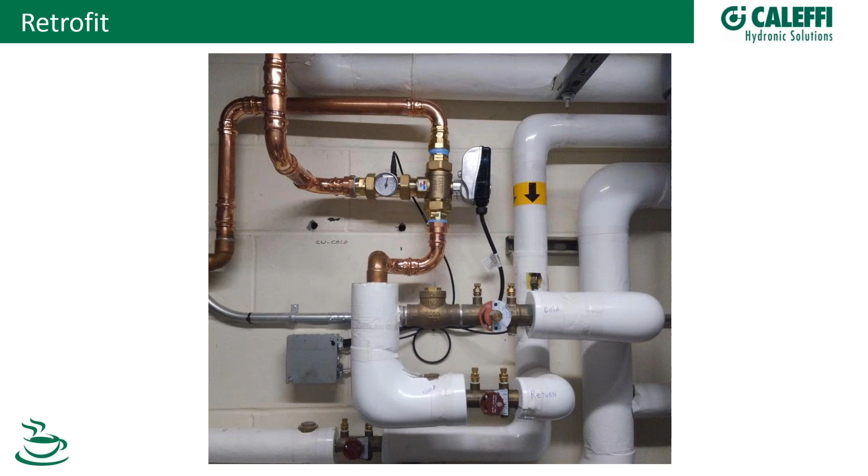Okay, very good. Another question came in, and it might have been shared with the audience already, but it relates to the growth of bacteria, which is becoming more and more commonly communicated in the press and media. The question is: does Legionella grow in the water or on the pipes? For example, if the recirc water is always taken back to the heater and heated back up to 140 degrees, would that sufficiently address bacteria concerns?

Like I mentioned earlier, it will look for somewhere to hide and feed. It has to feed off of something, so it's going to look for a place where it can stick to the wall of the pipe where there's some biofilm or corrosion, somewhere it can hide. Now, if it goes back to the heater, yeah, it'll be killed as long as it stays in the 140-degree water for a half hour. But generally, it will proliferate in the layers of the piping.